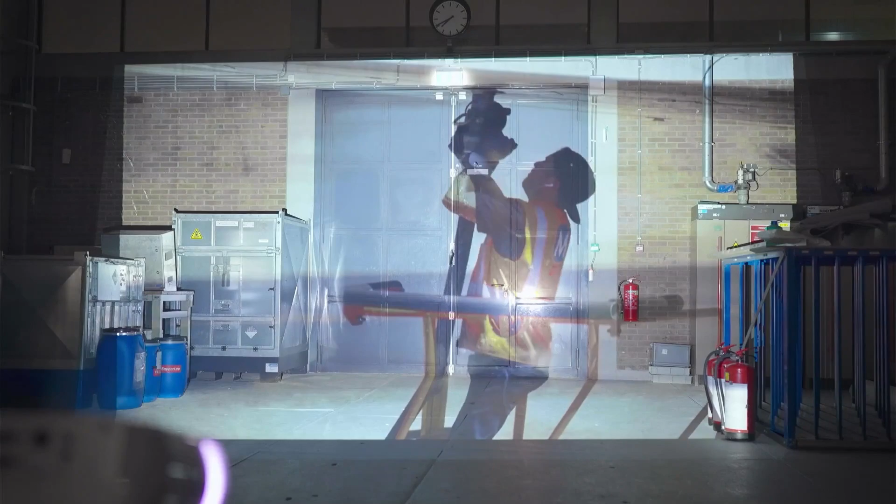We need to stop relying on planes for our mode of transportation. I believe Hyperloop is the future. In just 30 years, we will have built it, and it will be the most efficient mode of transportation yet.

I want to contribute to a sustainable future, not just for me, but for all the future generations. Hyperloop will change the way we travel. A fast and comfortable journey without any concessions.

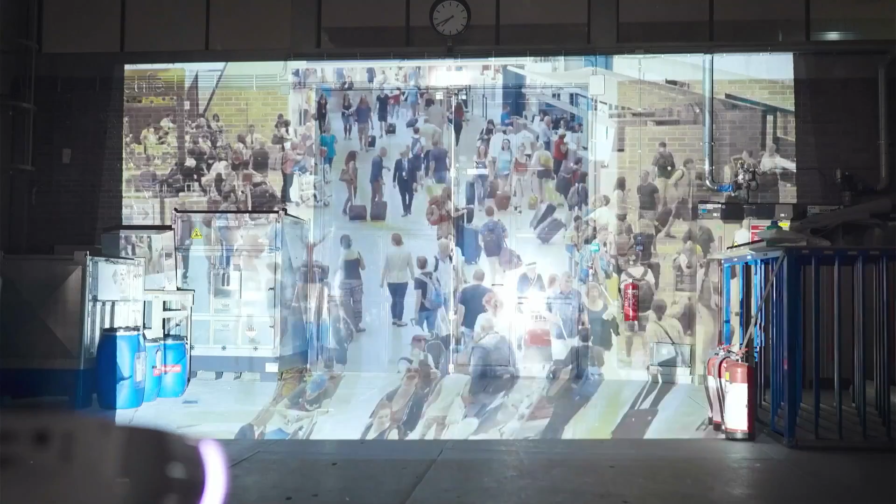What defines us is our adaptability during setbacks. We are designing on the edge of what is possible. We are Delft Hyperloop 6.

I joined Delft Hyperloop to work with a team of the most ambitious and high-performance students out there. A challenge, that is what the realization of Hyperloop means to me. It also means a solution to climate change, to long travel hours, and to the slow distribution of goods.

We create, we innovate, we take the lead.

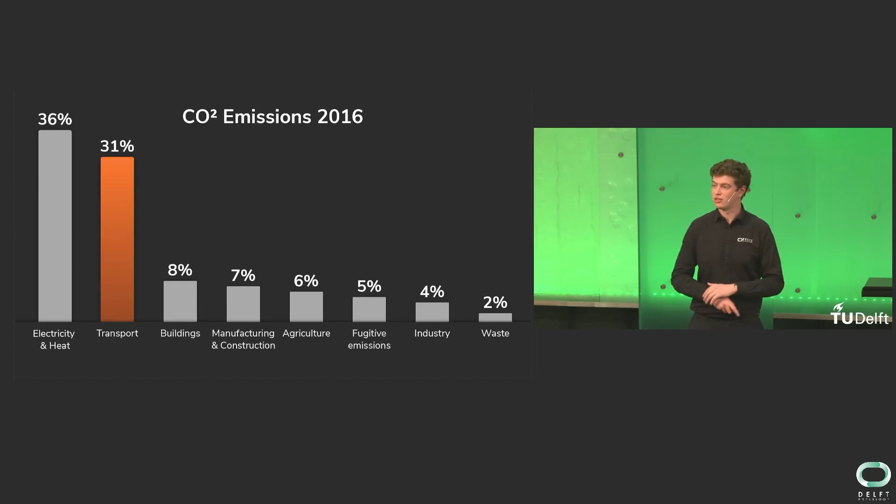So, the Hyperloop, floods - you're probably thinking, where is the connection? Well, for that, we need to look at CO2 emissions, the biggest contributor to climate change. So let's zoom in on the transport sector. We see that the transport sector contributes to 31% of the total greenhouse emissions. And if we look at this over time, this proportion is only increasing and increasing.

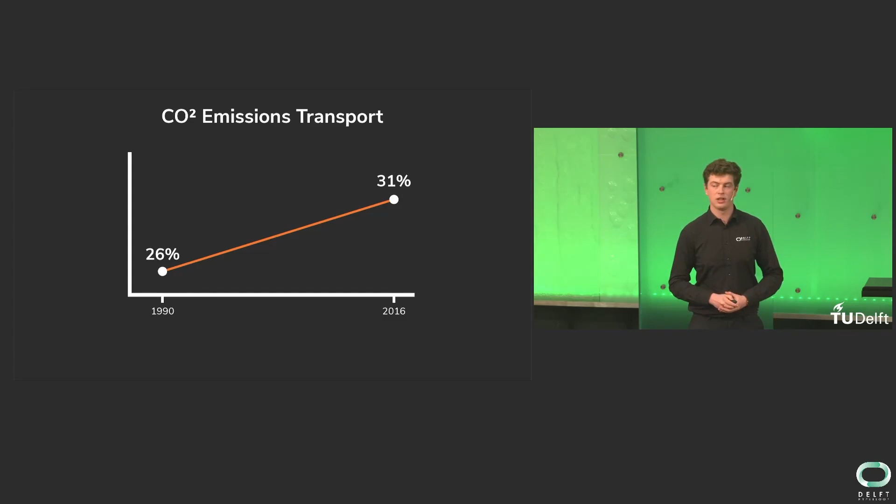So let's dive into this transport sector a bit further. We currently have 4 modes of transportation. You're probably familiar with most of them. And if we look, the last revolution in transportation was over 100 years ago, the plane.

Now, I'd like to pose a question to all of you. Have you ever been planning a holiday, say, to the south of France, and you were considering a plane? That is very fast, comfortable, but also polluting. And on the other hand, you are considering a train, a lot more environmentally friendly, but a lot slower. Well, I've been in this situation myself.

And much like many of you, I assume, I chose the plane. And my question is, can you blame us? But that is why we at Delft Hyperloop believe in a solution, in a fifth mode of transportation, one where you don't have to choose between speed and comfort and the environment. And that is why we think it's time to be part of the solution. And it's time for innovation. And that is why it is time for the Hyperloop.

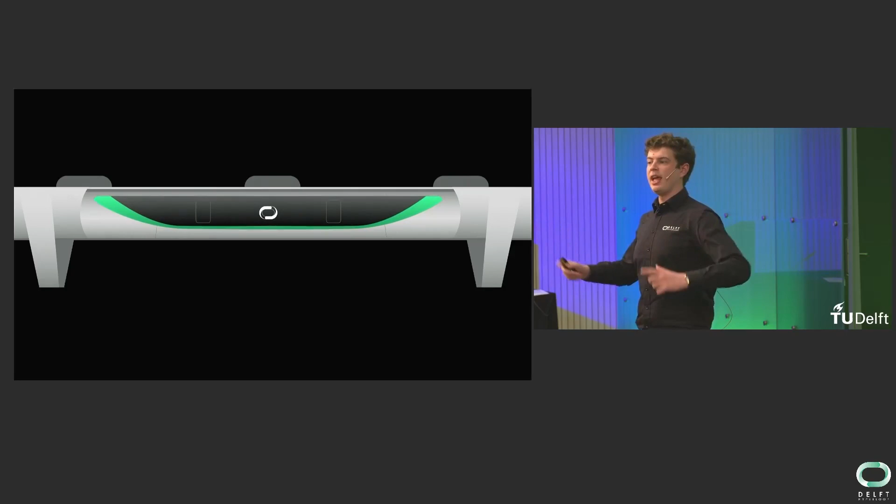So I've explained why we need the Hyperloop, what the current challenges of climate change are, but how does it work? Well, this can be explained in a few simple building blocks. First of all, what do we travel in? We call this a pod. It can be seen as something similar to a train carriage.

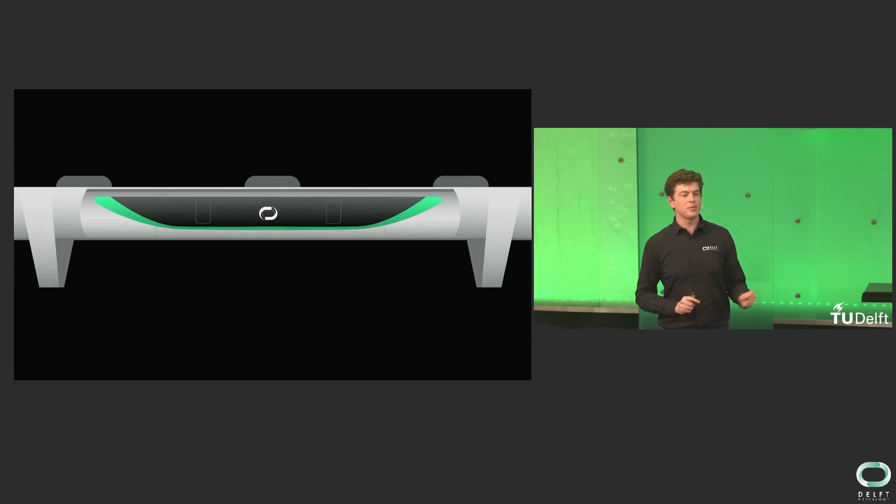The second thing we do, and the second variable we need to look at, is something that we've become all too familiar with over the last few days with the storms in the Netherlands. And that is air resistance. This is the first variable we remove. We do this by traveling through a near vacuum environment.

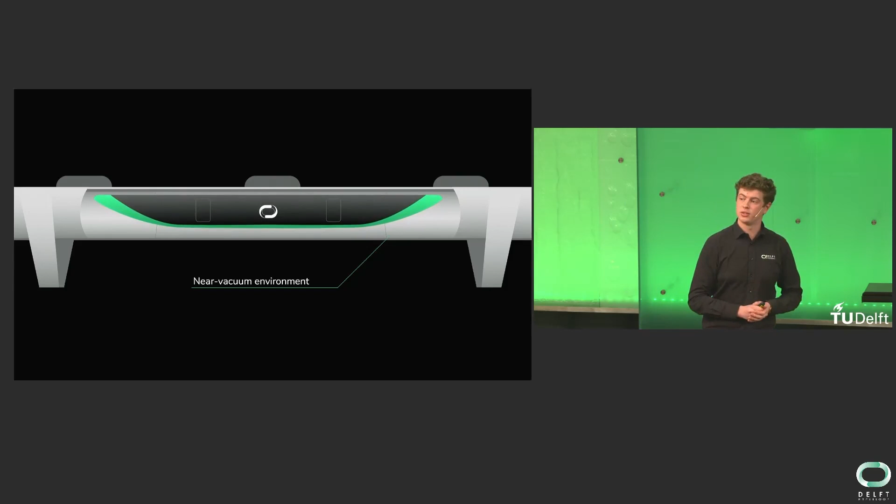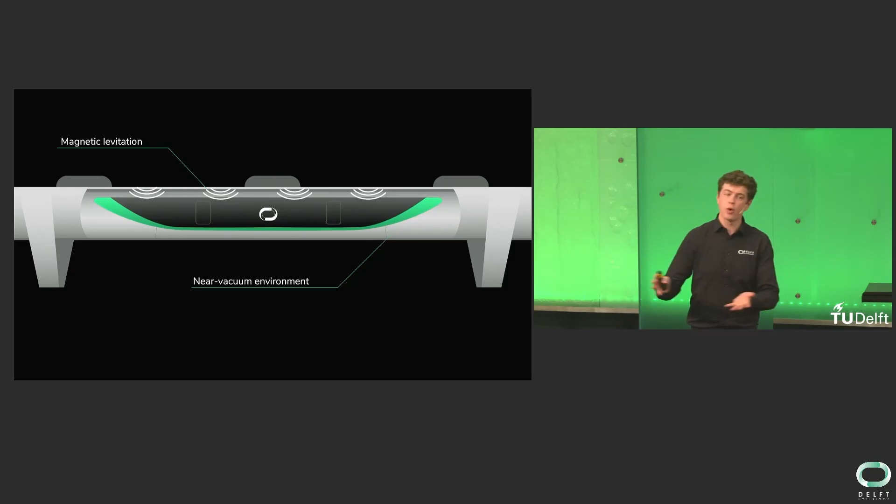Secondly, rolling resistance. This is the second variable we remove. We do this by means of a magnetic levitation system. And lastly, we need to move our pod forward. And this is done with a magnetic propulsion system.

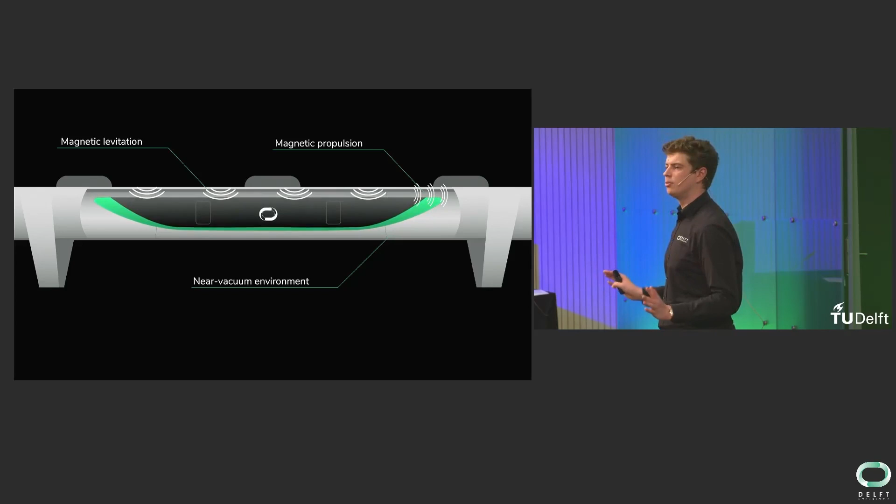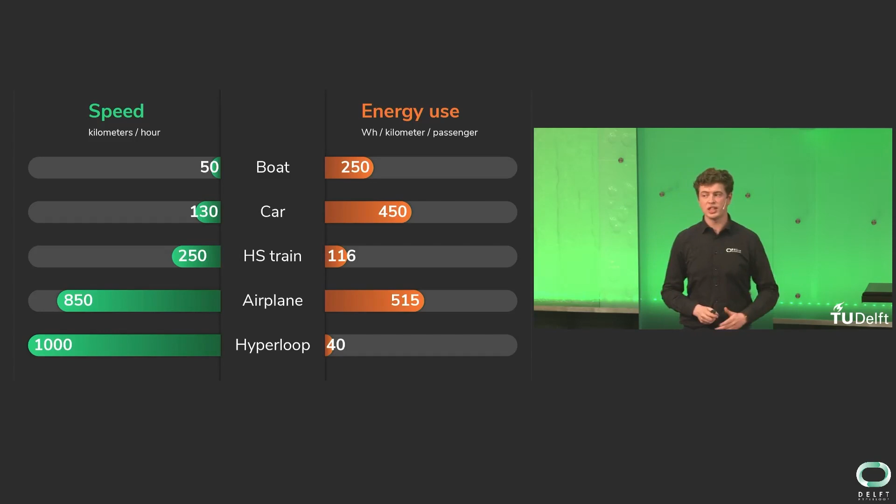Let's add the Hyperloop. We can instantly see that the Hyperloop travels at 1,000 kilometers per hour, faster than a plane, and at one third of the energy of a train. Now, ladies and gentlemen, when I saw this chart a few years ago, it became instantly clear to me: the Hyperloop is the future.

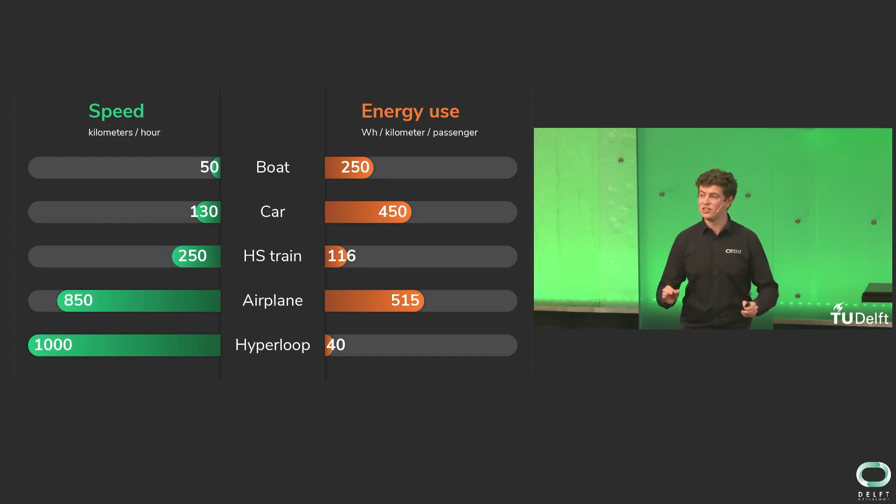So you're probably all thinking, how does a group of 38 students from TU Delft contribute to this? For that, I need to take you to our mission. Our mission has 3 major focuses: the desire, the technology, and the infrastructure for the future implementation of the Hyperloop system.

The desire: the Hyperloop is a very new form of transportation. We need to explain how it works to people, show them that it really is safe, and that the passenger experience is an enjoyable one. We at Delft Hyperloop also believe in an all-encompassing solution, one where we develop the best technology and do research into the future infrastructure required, so that we can have a seamless transition in the future.

But how do we contribute to this mission statement in just 1 year? Well, we do that by competing in the European Hyperloop Week, a competition where 34 selected teams from all over the world, ranging from North America to Singapore, come together and compete to push each other to do the best research and develop the best technology.

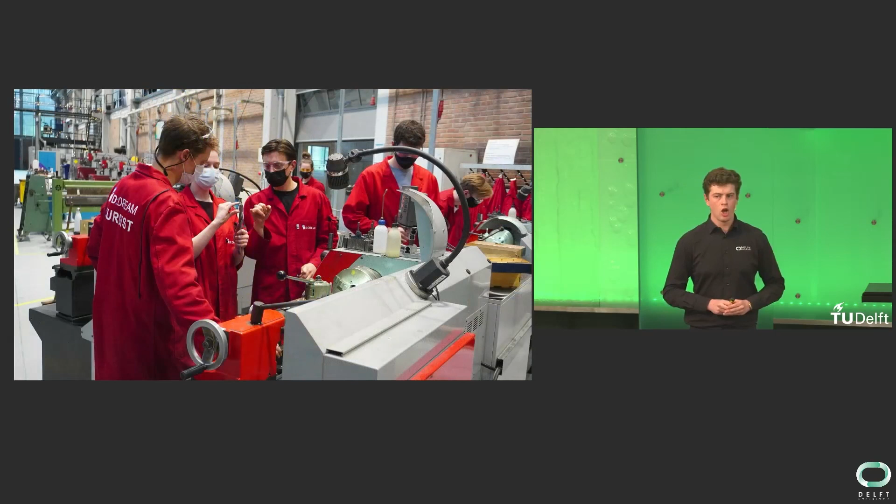And what we have today is a culture of collaboration, one where we use our differences in character and our diverse backgrounds to pull the best out of each other and make each other better every single day. And that is the journey we're on - one where we're constantly trying to reflect to see how we can do better, what's going well, and how we can be the best team at the end of the year.

And this team is the team that we as management are so proud to present to you all today: Delft Hyperloop 6. With this team, we are going to take 3 giant leaps forward. We are going to develop the best pod Delft Hyperloop has ever seen. And ladies and gentlemen, with this team, we are ready to take the lead.

I'd now like to hand over to Thijs Bolscher, our project manager, to tell you a little bit more about how we do this.

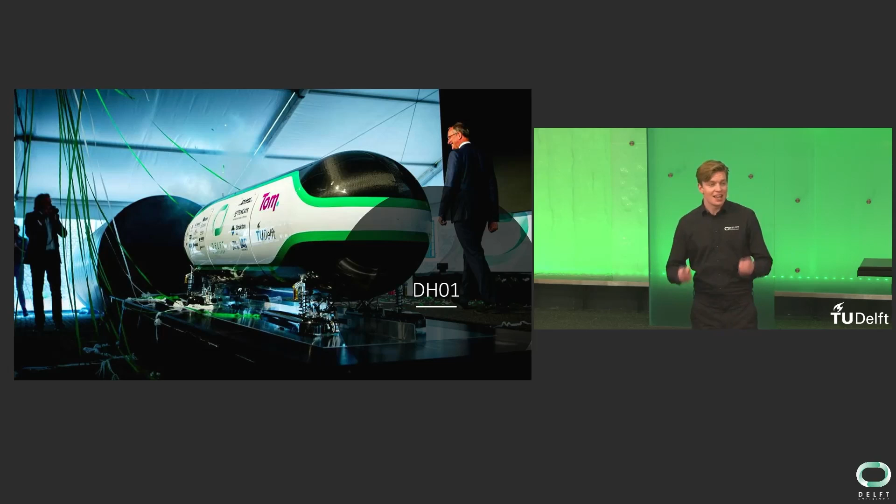Now, ladies and gentlemen, I think you might understand that this is the history that we are so proud of today. This is the history that we build upon. And it all started with DH01 back in 2016.

Back then, inspired by Elon Musk's visionary idea, DH01 took part in the first edition of the SpaceX Hyperloop competition that took place in Los Angeles. In this first edition, Delft Hyperloop took home the first prize, beating over 2,000 competing teams along the way.

DH02 took part in the third edition of the SpaceX competition. However, due to an overheating temperature sensor, the pod came to a standstill after reaching 142 kilometers an hour.

DH03 was the last Delft Hyperloop team to take part in the SpaceX competition. DH03 was a multidisciplinary team with students from Amsterdam and Delft. They reached speeds of over 200 kilometers an hour. This gave them fourth place in the competition. Once again, Delft Hyperloop beat hundreds of teams from all over the world.

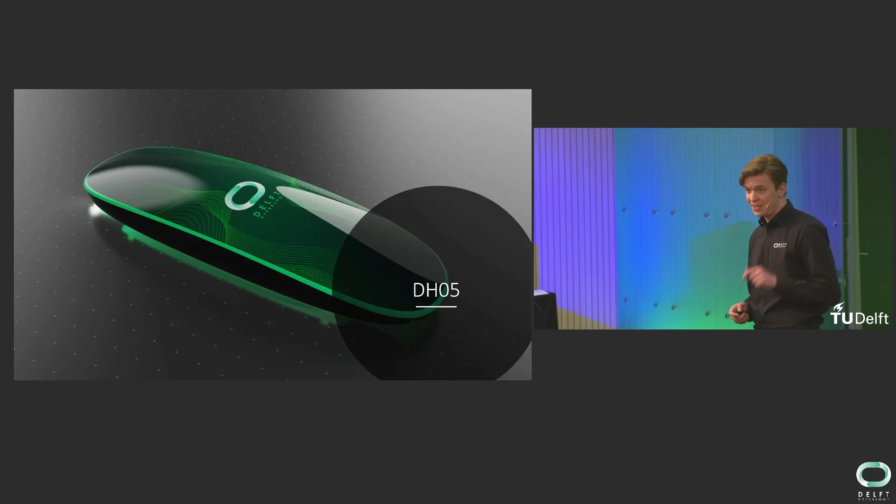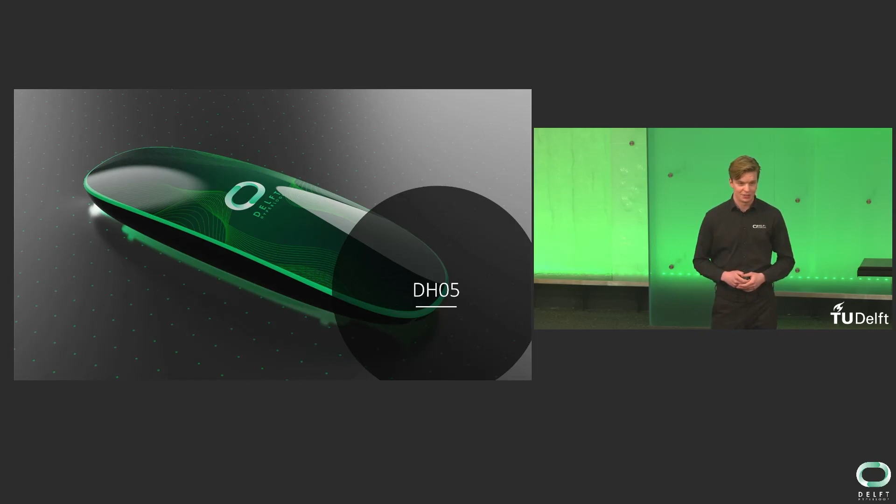These teams are our inspiration. These teams are our foundation. And as I said, these teams are what we build upon today. Now this year, it was our turn. And we decided it was time to take matters into our own hands. We decided it was time we take the lead.

Delft Hyperloop 6 stretches what can be done with 38 students in only 1 year. Students who learned how to design but have no hands-on experience producing or testing a technical prototype. So no experience? What does this mean? It means that we need to learn quickly. Things will happen that you cannot foresee.

Let me take you back to October. Back then, we spoke to one of our partners who would deliver to us the motor drives, basically the heart and the lungs of our propulsion system. That day, we learned that the delivery times of those motor drives were way longer than we expected. We put our heads together and we started looking everywhere for those motor drives that our system needed. In the end, in a small museum in Berlin, we found a test setup, a huge test setup, with exactly those motor drives that our system needed.

We started looking for 4 motor drives, and we ended up with a 9,000 kilogram test setup. The floor of our workspace couldn't even carry it. Now, I dare to say, ladies and gentlemen, that setbacks like these, we are used to them. The solution-oriented mindset of this team keeps surprising me. And trust me, it will surprise you.

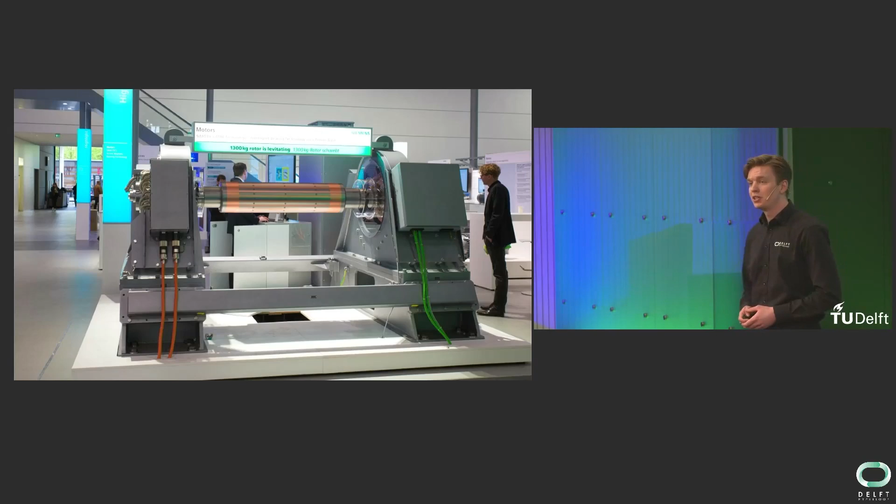Now let me show you what a typical year at Delft Hyperloop looks like until we get to the competition in July. We start with the design phase. During the first 4 months of the project, our engineers need to come up with a concept and need to work it out to its finest detail. For this, our engineers need astronomical effort and a tremendous eye for detail.

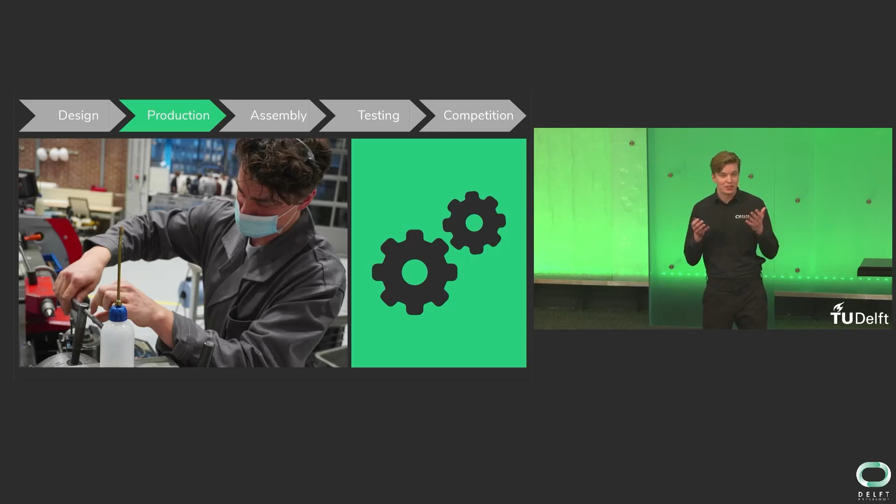Once everything is designed, we go on to our production phase. This is the phase that we are in today. Our engineers finally get to put their hands to work to produce what they designed weeks earlier. Drawings become materials, and materials become parts.

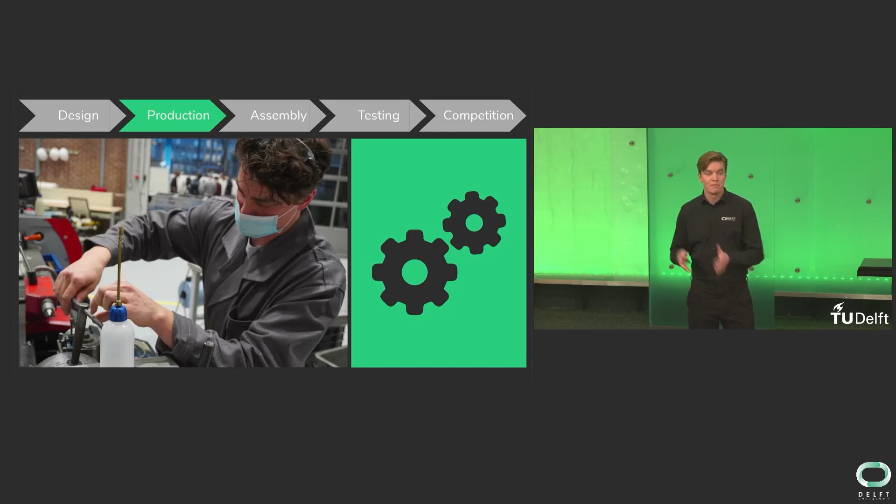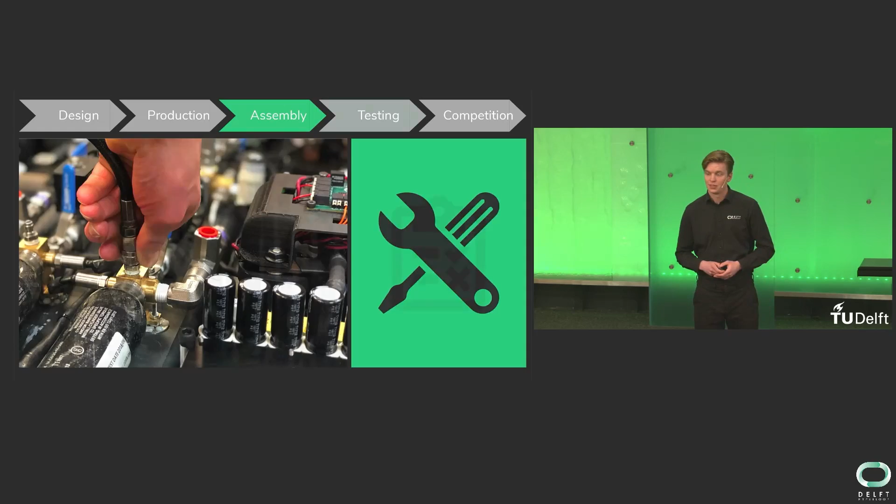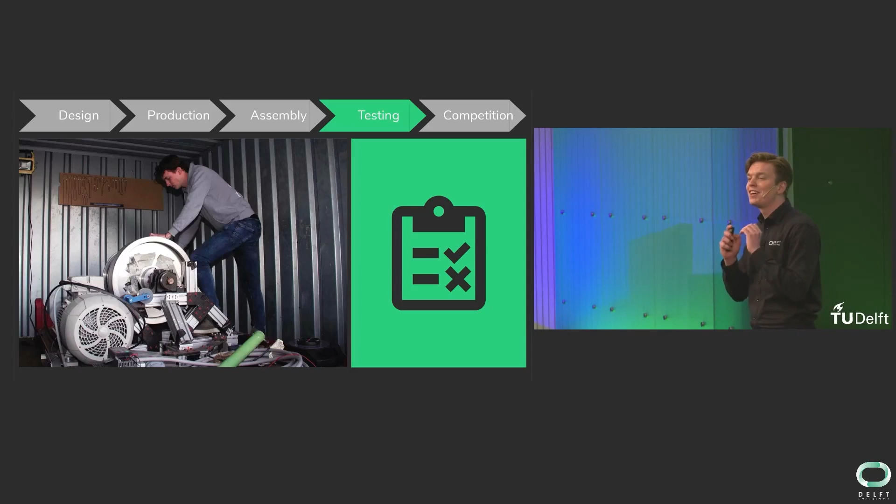And once everything has been produced, we start putting things together. For the first time, we really start recognizing the subsystems that we designed weeks earlier. Our pod really comes to life during what we call the assembly phase. And now our system has been put together, we start testing. The goal of the test phase is to make sure that our system is so robust that it can face all challenges and the competition at the European Hyperloop Week.

Now, to make our dreams come true throughout the year and to rake all those resources together that we need, we have our business department. And this is the department that you know best. They are responsible for managing our partnership relations and our face to the outside world.

Now, ladies and gentlemen, we are coming closer and closer to that moment that you have all been waiting for. I told you about our challenges this year, I told you about our history, and I told you about what a year at Delft Hyperloop looks like. I told you that this year, we take the lead. But how?

Imagine, in 15 years from now, the Hyperloop infrastructure could take you from Amsterdam to Brussels and from Brussels to Paris. If the Hyperloop system would not be able to switch lanes like a conventional train can, we would have to go from city to city, one after the other, and we would need to stop at every station, prolonging our travel hours. Now, if the Hyperloop system would actually be able to switch lanes, we would be able to use the same Hyperloop infrastructure that takes us from Amsterdam to Paris to also take us from Amsterdam to Brussels. And this would save us many kilometers of Hyperloop infrastructure, thus materials and thus cost.

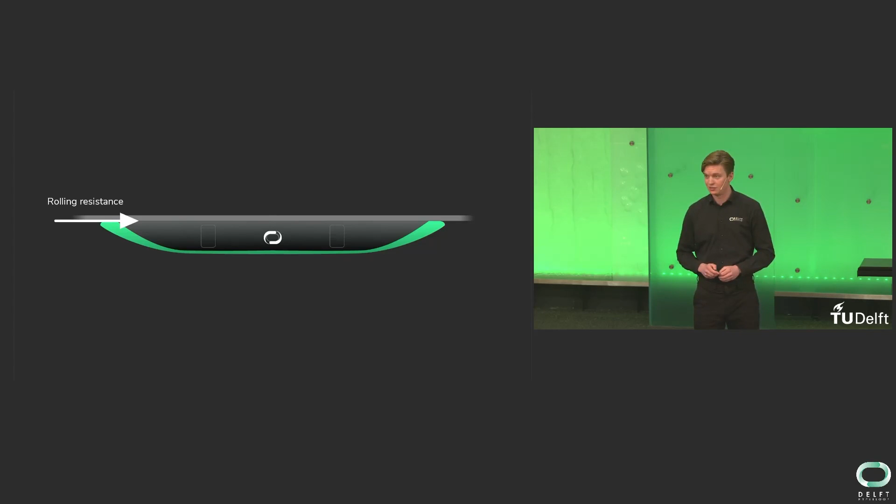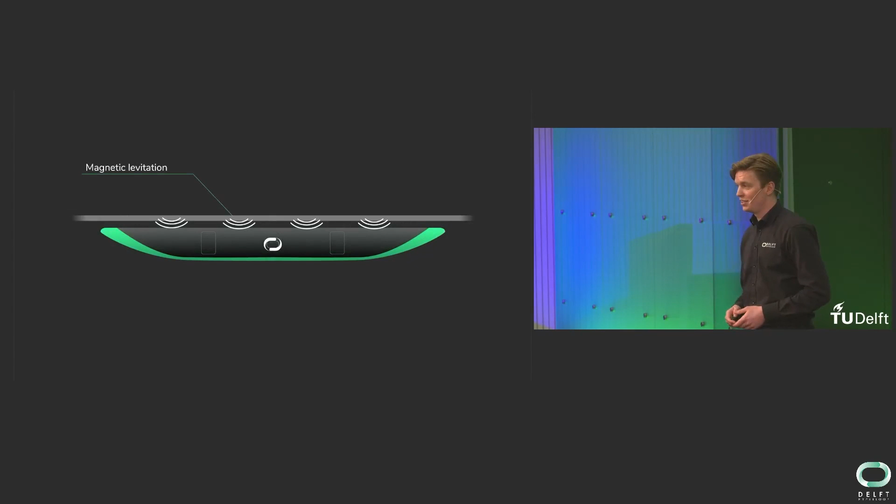Let's move on to our second problem, rolling resistance. As Patrick explained at the start of this presentation, the Hyperloop system relies on taking away almost all resistance. But before we can take away rolling resistance, we need to do something new: we need to levitate. And this year, ladies and gentlemen, this is exactly what Delft Hyperloop 6 is doing. We will levitate.

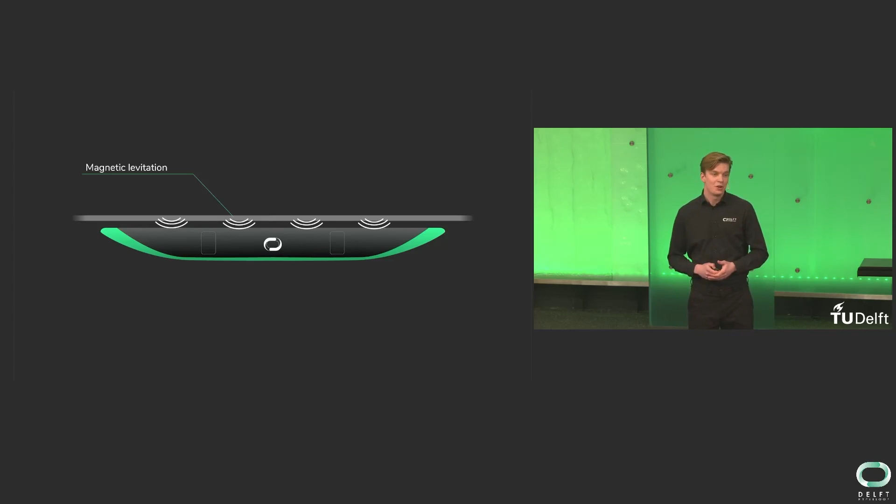And then finally, our third giant problem: before the Hyperloop system can be implemented in the real world, we need a highly efficient propulsion system. Last year, DH05 took a brave step and chose a new configuration for their propulsion system. However, within this configuration, there were still many steps to take until it becomes a scalable option. This year, Delft Hyperloop 6 is taking those steps. We are building and coming closer to finding the propulsion system you'll find in the future Hyperloop.

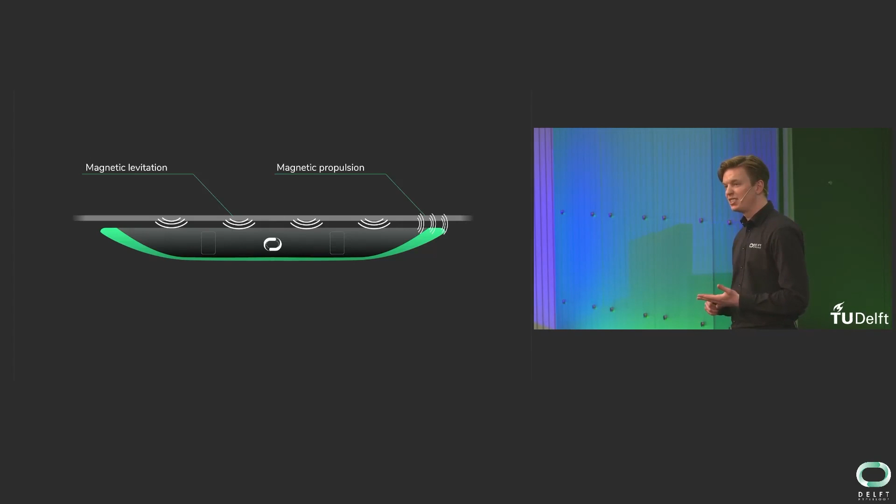So three giant leaps: a hanging system, we are levitating, and we are building the propulsion system you might find in the future Hyperloop system. And now we know all this, we are ready for that moment you are all here for. I am beyond excited to show you the design this team has been working so hard on. I am beyond excited to reveal to you Helios 1.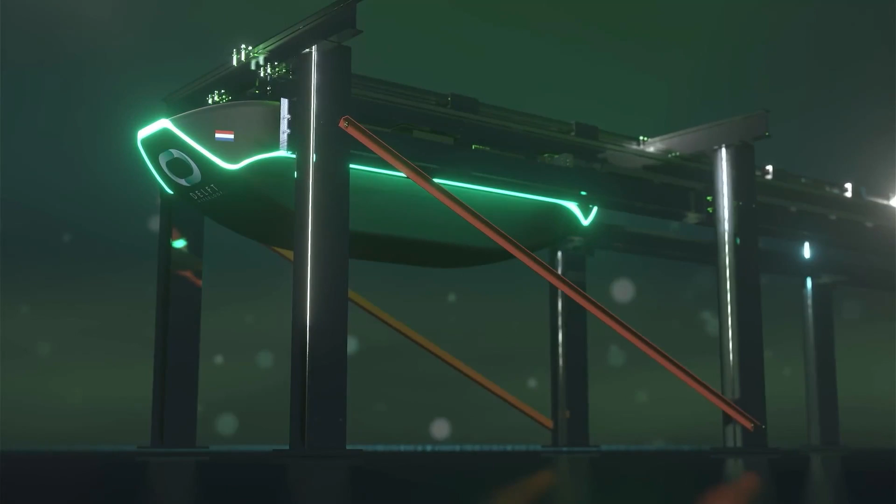Wow. I have seen this design go from a piece of scratch paper to a full 3D model to production. I see it every day and it still amazes me.

I am Hidde de Bos and I'm the chief engineer of Delft Hyperloop 6, which means I'm the one responsible for making sure all subsystems work together optimally. Tonight, I would like to take you on a journey through our new and improved design while showcasing the most radical decisions and changes we have made.

As we've mentioned numerous times before, scalability is an imperative part of our design process. This is why we have a separate department for it. They research the technical side of a full-scale Hyperloop, as well as designing for proper passenger experience. With scalability, we are getting ahead of the issues and laying down the framework for the future of transportation. All of this research trickles down into our engineering, because we are again focusing on a winning, scalable design.

This is mostly embodied in our three design pillars. There's overlap between the three of them, but together they form the cornerstones of our new design. First is efficiency. Without efficiency, a Hyperloop can never overtake a conventional mode of transportation. Making the most use of the energy we have is the only way to build a usable system.

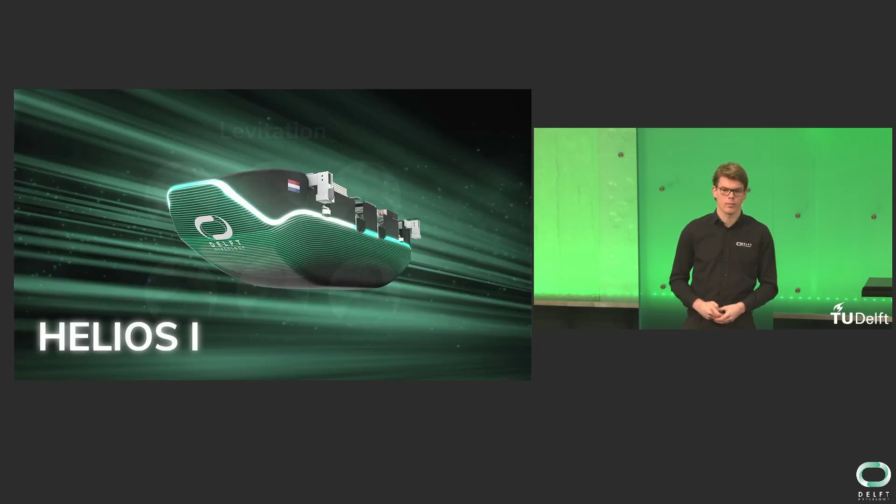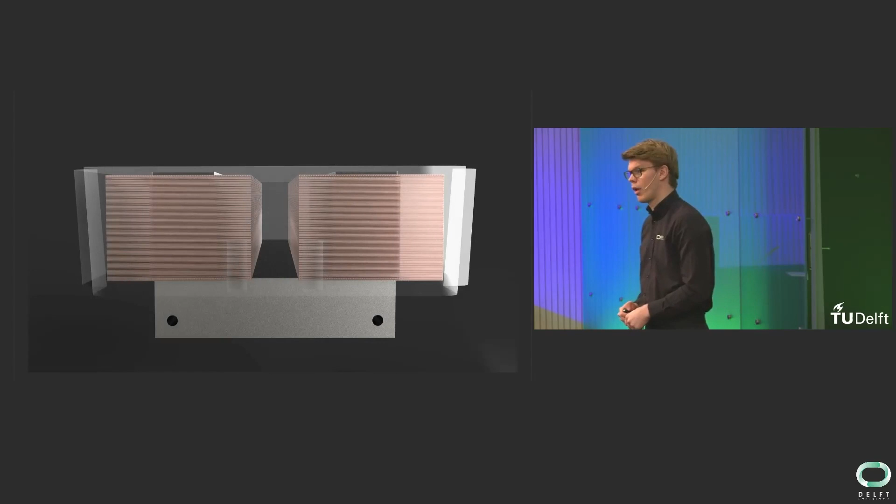Building a levitating system was one of our most crucial choices, so let's start there. This part of the system is designed, produced, assembled, and tested by our levitation department. They focused on finding the best possible levitation system by looking at our design pillars. By combining the efficiency, scalability, and robustness arguments, and considering all different options of levitation, they eventually settled on hybrid electromagnetic suspension, or HEMS. This HEMS is implemented via the four U-cores, of which you see a front view here. I will now explain how the system works.

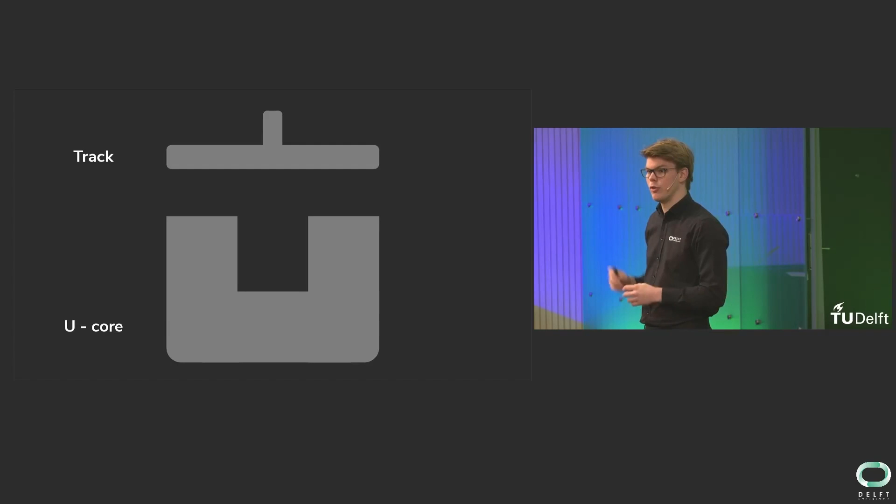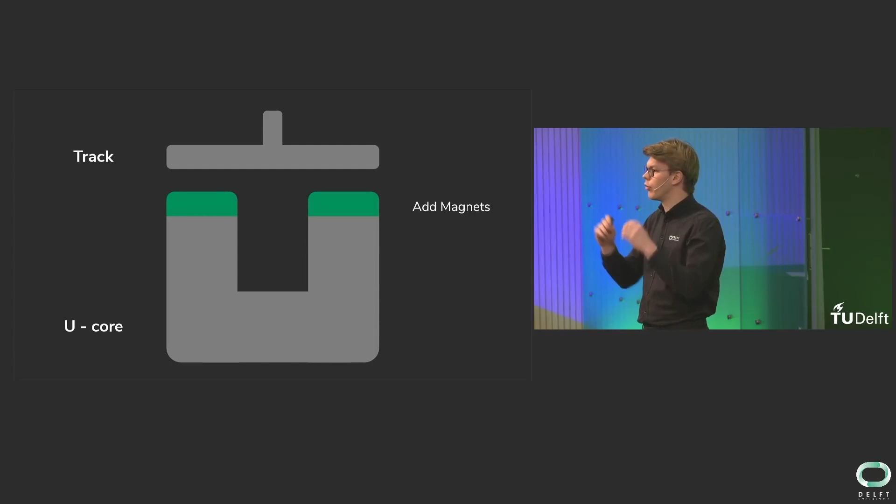We start off with a steel track beam and an iron U-shaped core. Both of these parts conduct magnetic fields really well. We then glue permanent magnets on top of our U-cores, and you will see that the magnetic field starts flowing.

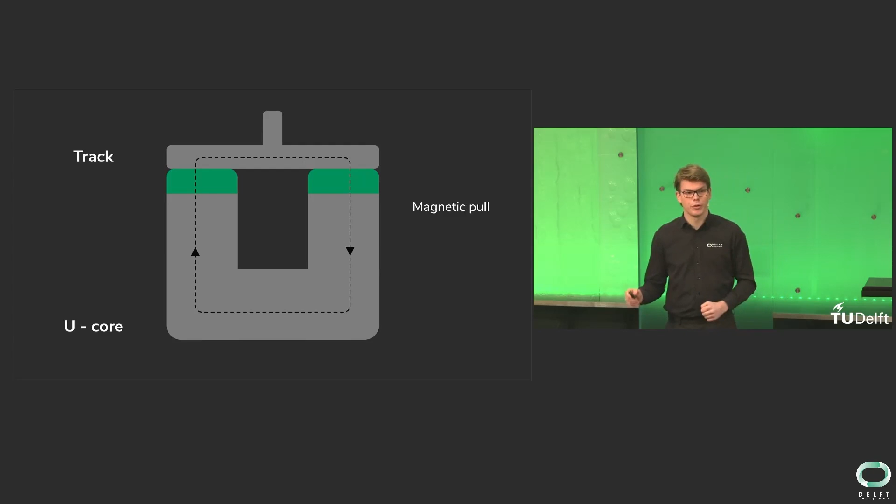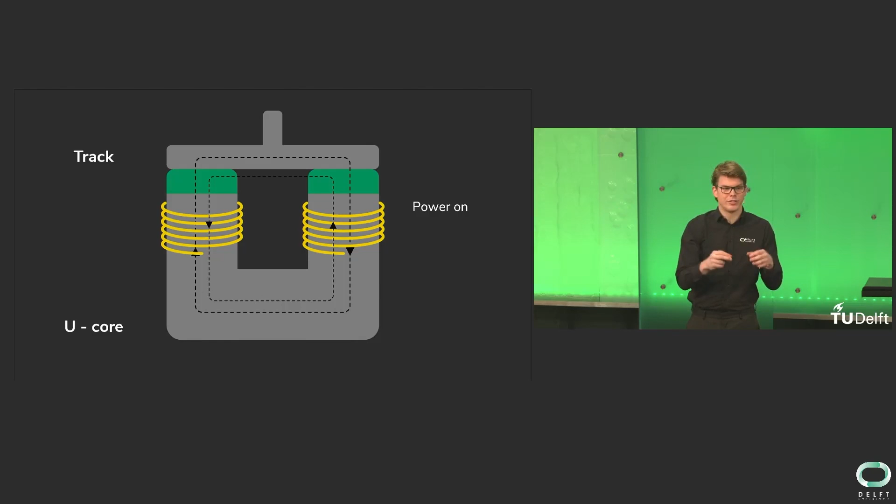We are now pulled towards the track. Unfortunately, we are also stuck to the track as well. To make us come loose, we will use coils, which when powered, create a magnetic field in the opposite direction. By putting these coils around the U-cores, we can generate a magnetic field that opposes the field of the permanent magnets so far that we start coming off the track. We are now levitating.

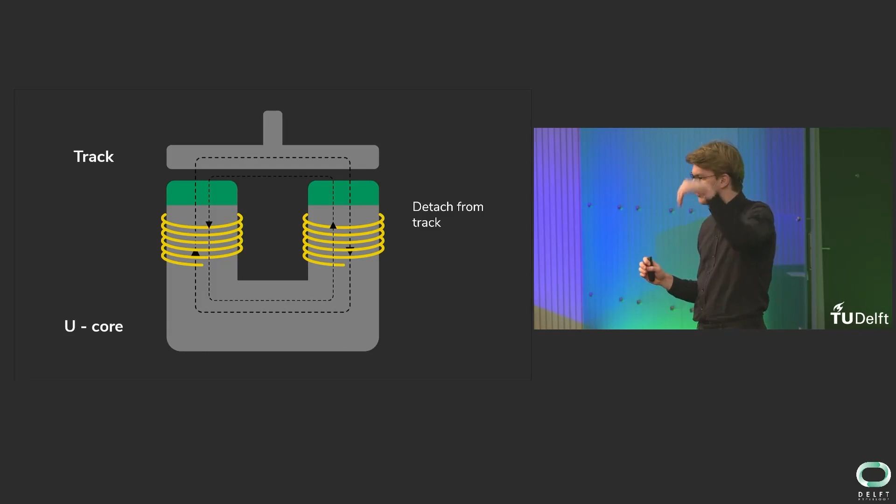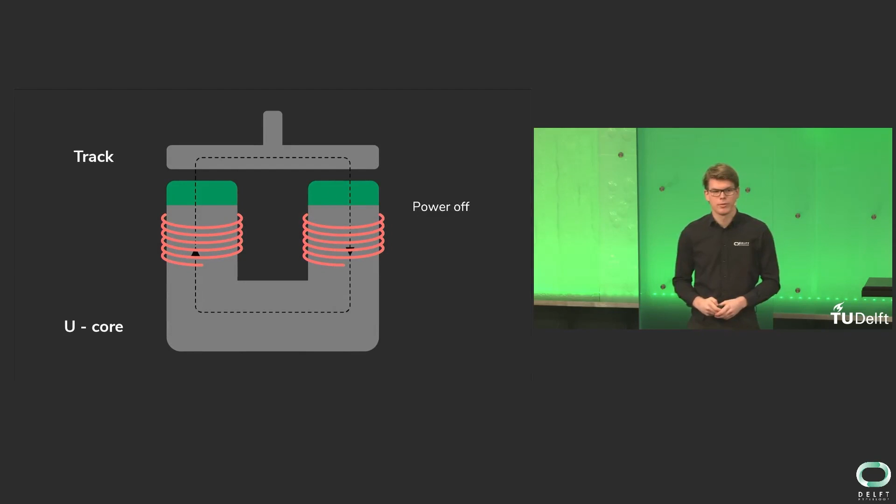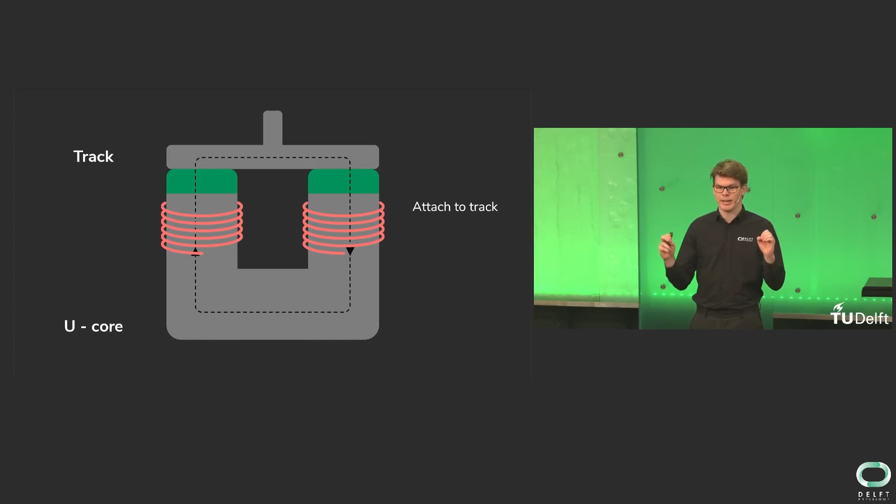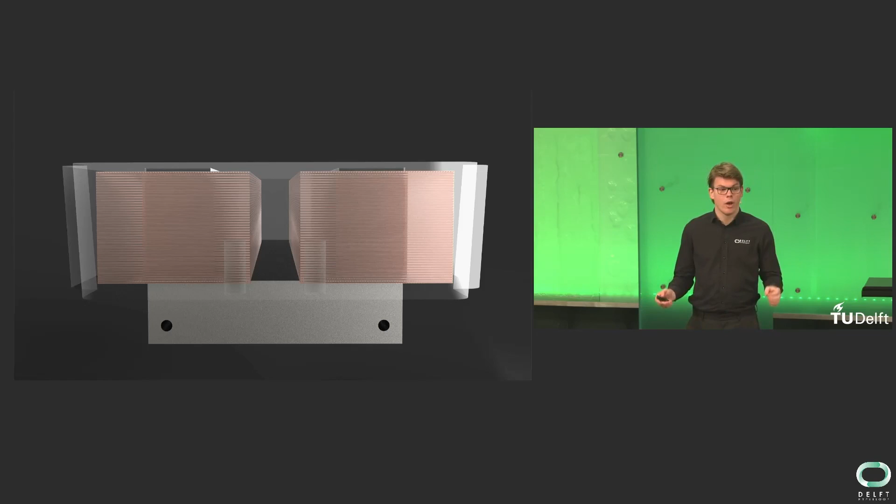Designing a system like this is extremely difficult. There are over 1,000 configurations, varying the size of the core, the thickness of the magnets, and the amount of windings of the coils. Furthermore, the operational range of our U-cores is just 4 millimeters, a tiny amount. However, the magnets we need to attract ourselves to the track are so strong that when stationary, they can carry 4 full-sized camels.

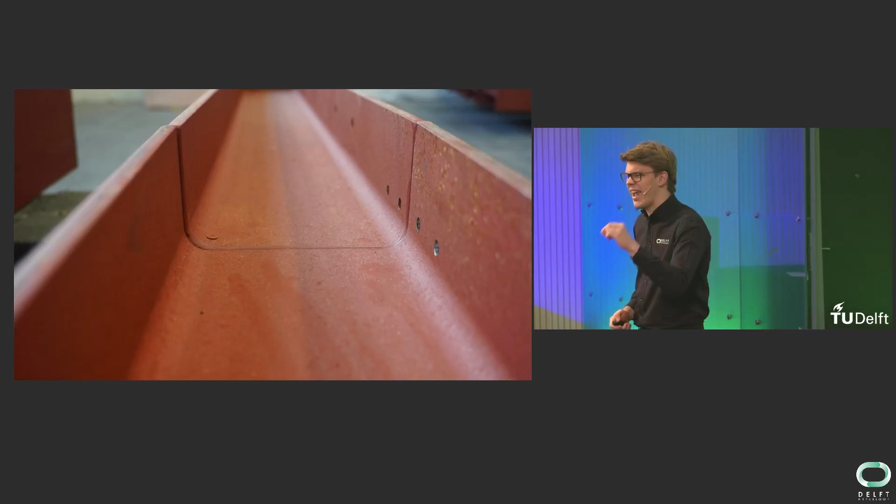The difference between these 2 scales is enormous. On the one hand, we have super strong permanent magnets, and on the other, a tiny margin for error. The greatest challenge is keeping us off the track. Why? Imagine driving on the highway over a speed bump as large as me. That is the bump that is introduced by the 2 millimeter offsets in our track. A tiny amount, yet it still yields great problems.

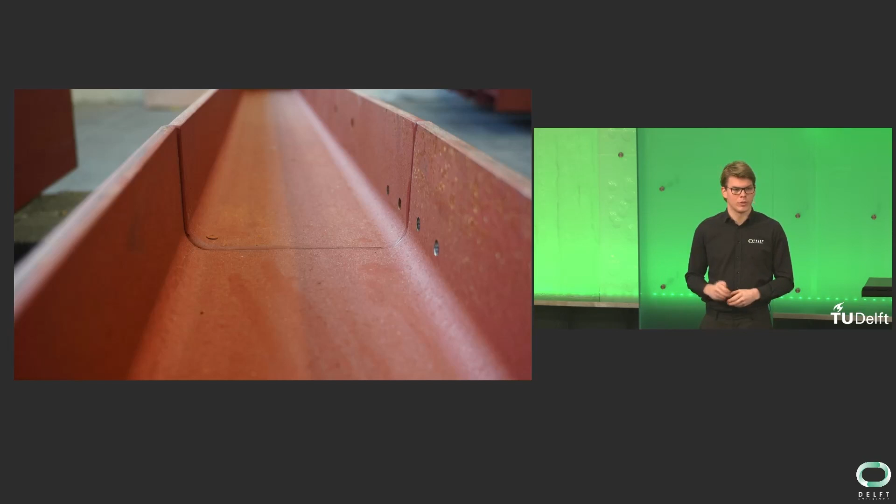To keep us off the track, we need an incredibly fast control system, which is implemented via our 4 motor drives.

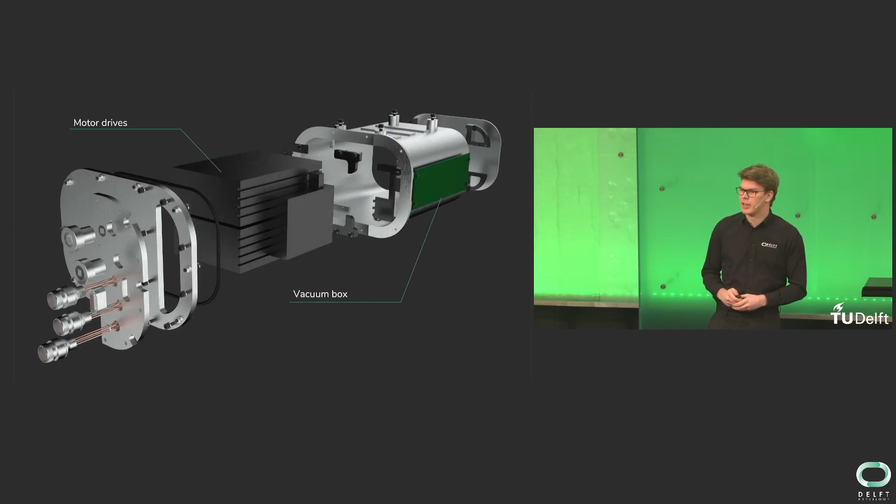Now, because we wanted our pod to function in vacuum, these motor drives had to function with almost no air around. Unfortunately for us, our motor drives were not vacuum compatible, which meant that we had to design vacuum boxes. This turned out to be an unexpectedly great challenge. Apparently, making something vacuum compatible is quite hard. Who would have thought?

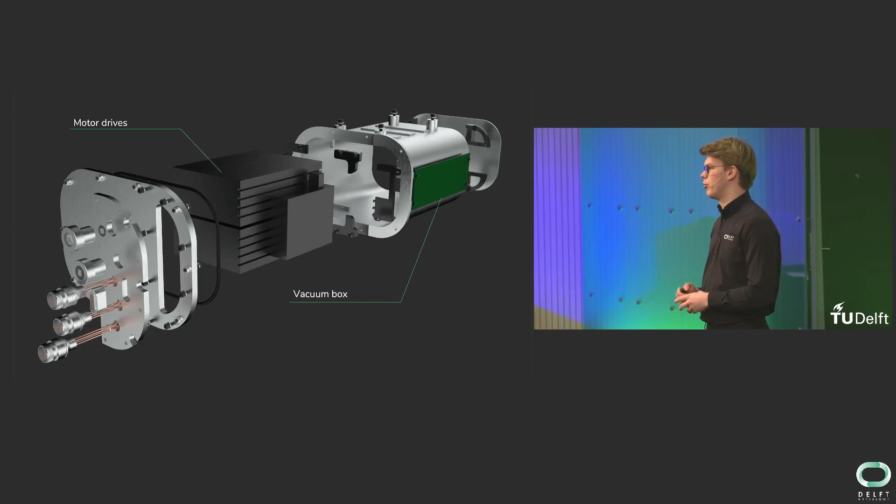These vacuum boxes make sure that our motor drives can play a pivotal role in keeping us off the track. Speaking of the track, it stands tall at 1.6 meters high and 1.4 meters wide, and weighs in at about 2.5 large African elephants, or about 14,000 kilograms in standard units.

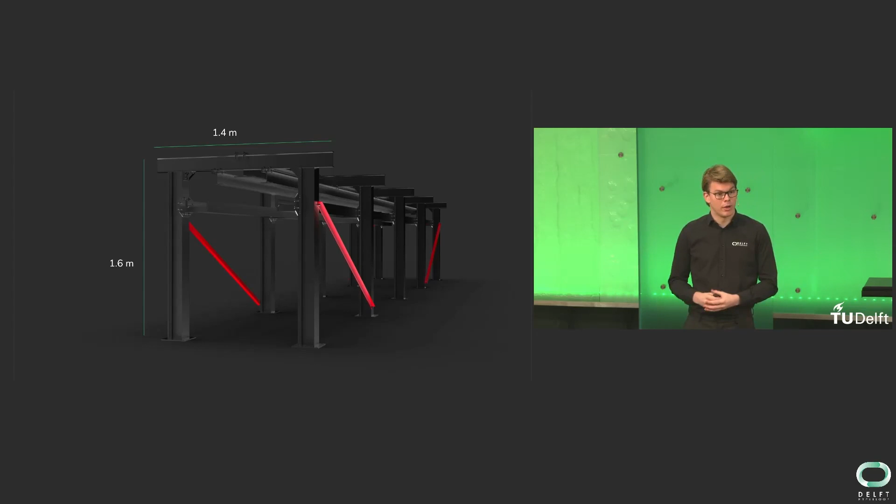Its height and width may not be large, but its length rivals the length of a Boeing 777, coming in at 74.5 meters. We have to align this 74.5 meters with a margin of just 2 millimeters. Imagine looking over the top of a Boeing and spotting an offset of just 2 millimeters. It's incredibly hard. This is why we have designed the track to be highly adjustable.

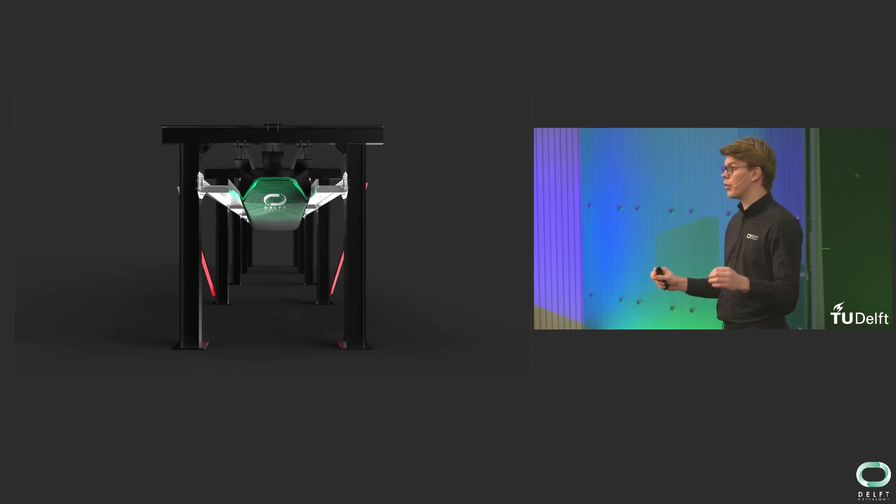It consists of these beams on the top, underneath which our pod hangs. On the side, we have the beams to constrain the lateral movement of the pod. These beams are made such that they can catch the pod if it ever drops down. They are designed to be so strong that they can carry 2 Tesla Model X's on either side. In other words, this mechanism is insanely strong.

Lastly, the track also provides the anchoring point for our propulsion system, because this was another one of our great design choices. Now that we are levitated and guided along a track, we need to move. This movement is created by the motor designed by our propulsion department.

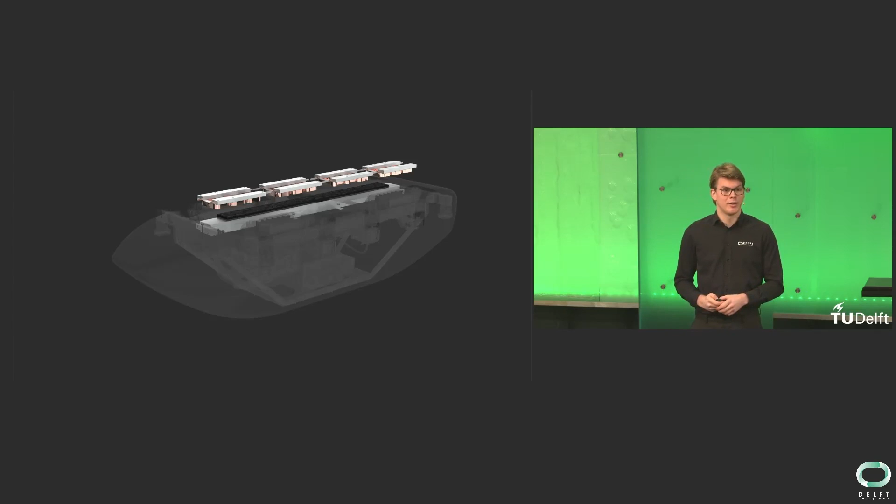They have improved on last year's design by building a one-sided linear synchronous motor. A design that uses permanent magnets on the pod, oriented such that all the magnetic field is on one side, and with the coils in our track, we can then push our pod. By running current through these coils, we create a magnetic field which opposes the permanent magnets on the pod and propels our pod forwards.

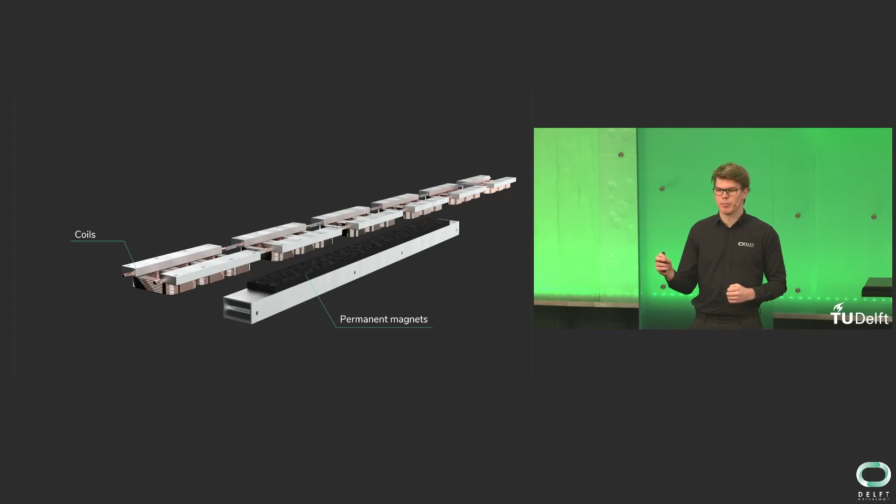Not only is the system more efficient in terms of operation, it also allows for regenerative braking, a form of braking in which the coils slow down our pod, generating power that we can put back into the grid. Hence, the eventual speed generated by an already efficient system is almost entirely used to generate power instead of heat.

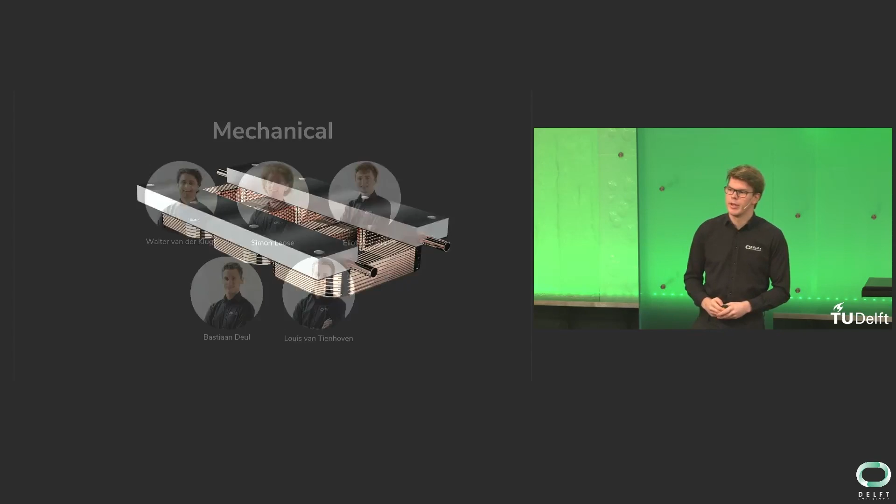Now that we are levitated and moving, we need a backbone to attach to. This is where our mechanical department comes in. Aside from designing and building the track, they are also responsible for the chassis.

They have worked tirelessly to create a chassis that emulates real-life, full-scale Hyperloop designs. To do this, we decided not to be bound by any single material like previous teams, but instead choose the most optimal material for every part of the chassis.

The top part is an aluminium ladder frame design on which most of the systems of the pod are mounted. Hence, it had to be easy to mount things, easy to analyze, but also withstand the loads exerted on top of it. Aluminium turned out to be the most suitable choice.

On the other hand, we have our carbon fiber space frame, which houses the batteries. Because the loads on this part of the chassis are different, carbon fiber turned out to be the more optimal choice.

We believe that with this combination of materials and shapes, we've reached the exact combination of strength, weight, and scalability that we deem perfect. This last point is especially embedded in the new three-dimensional shape our pod has attained.

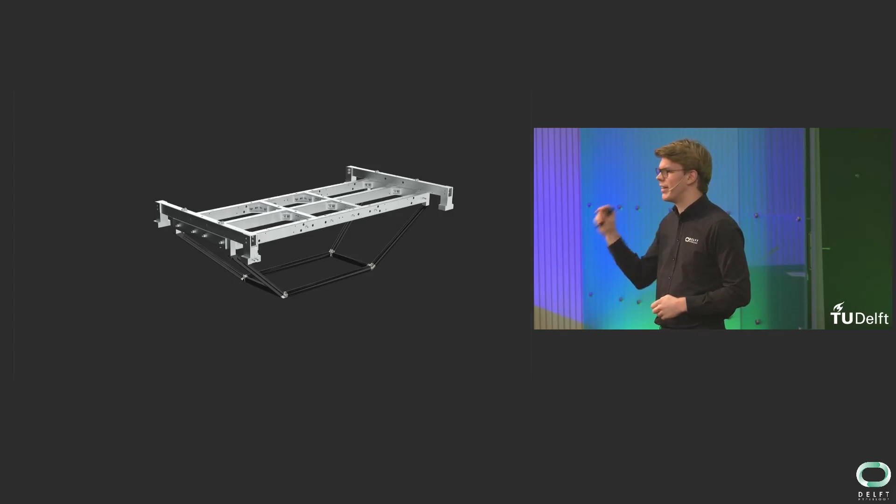It looks more like a full-scale Hyperloop design than ever before. We are pulling out all stops on manufacturing, combining aluminium and carbon fiber, while also utilizing high-tech, state-of-the-art methods like 3D printing titanium connection pieces.

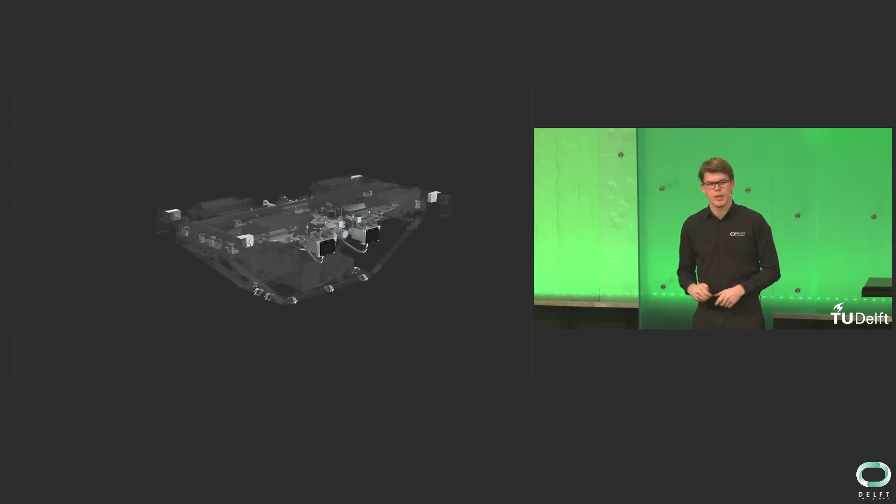Now, as you know, our pod can already brake very efficiently on the propulsion system. But to make operations even safer, we've also designed emergency mechanical brakes. These brakes are designed to be completely fail-safe.

By using pneumatics to retract the brakes rather than extend them, we have created brakes that will automatically engage if there's an issue anywhere in its pneumatics air supply. Additionally, these brakes allow us to perform top-speed runs utilizing the entire length of our test track.

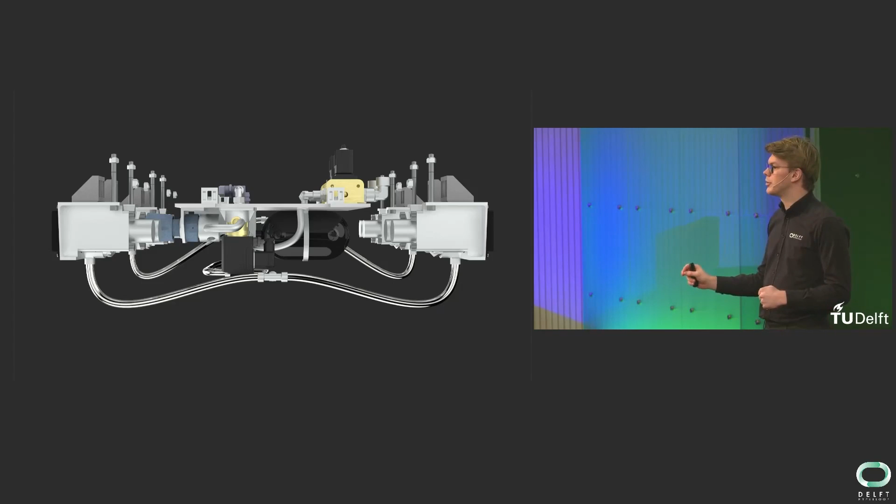Now that all the magnetic and mechanical systems are in place, we need a way to control it. This is where our sensing and control department plays a pivotal role. They are responsible for all inputs, outputs, maintaining communication, and providing power to the pod. Essentially, you could think of them as the heart and brain of our system.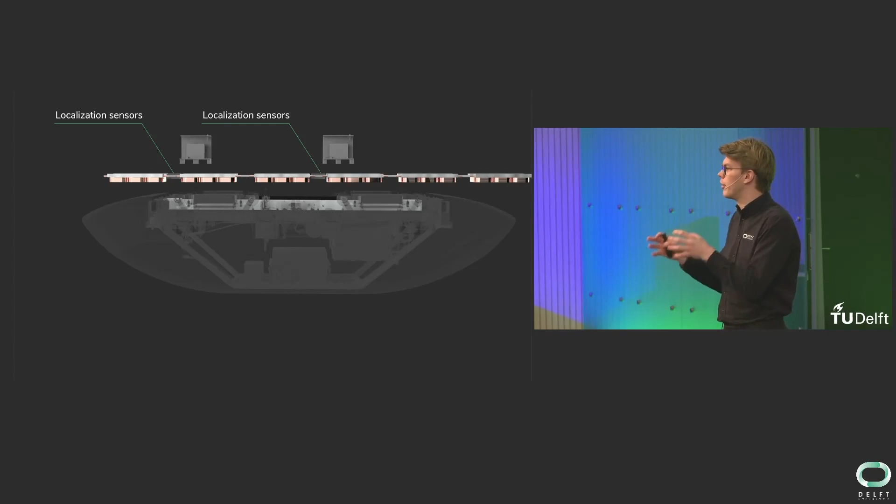It needs to be extremely accurate and fast. If the location of the pod is off by just 5 centimeters when it's moving at 75 kilometers an hour, the entire system fails to work. Similarly, if the delay is just 5 milliseconds, the system grinds to a halt. Without localization, propulsion essentially would not work.

Aside from the localization system, Sense and Control is also responsible for all inputs, outputs, and monitoring the pod's behavior. The system senses using all 150 plus sensors to maintain oversight. If the anomalies are too big or the pod loses communication, we immediately brake to maintain safe operations.

Now, a system like this would not serve as a complete Hyperloop prototype if it did not have an aeroshell. Because even in near vacuum environments, there is still a buildup of air in front of the pod. The aeroshell reduces drag, for which it has been optimized by our mechanical department. Not only this, but it also allows for the scalable fact that the pod can move in both directions.

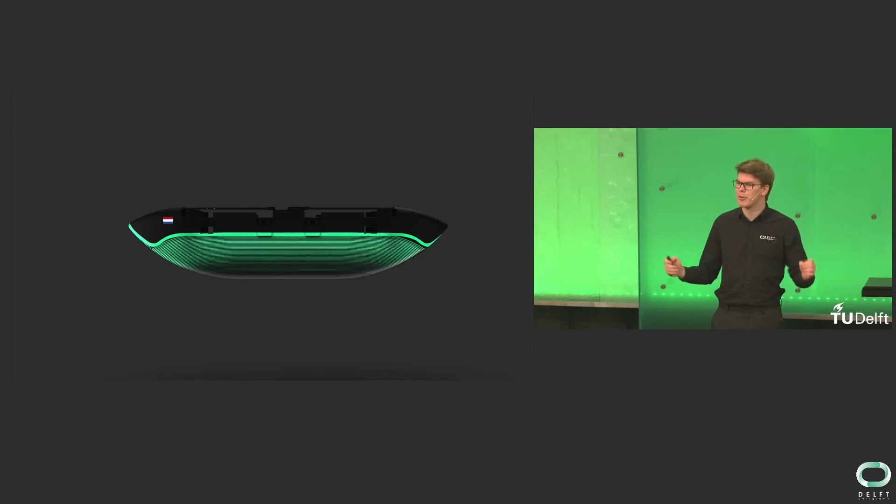We've now shown off the entire Delft Hyperloop 6 system. Everything has been designed such that it is vacuum compatible and can easily be scaled up. The Helios 1 is the best Hyperloop system Delft Hyperloop has built so far, and I'm extremely proud of what we've achieved. Can I please get a warm round of applause for the team that made Helios 1 happen?

Wow, incredible what this team has accomplished in just 6 months.